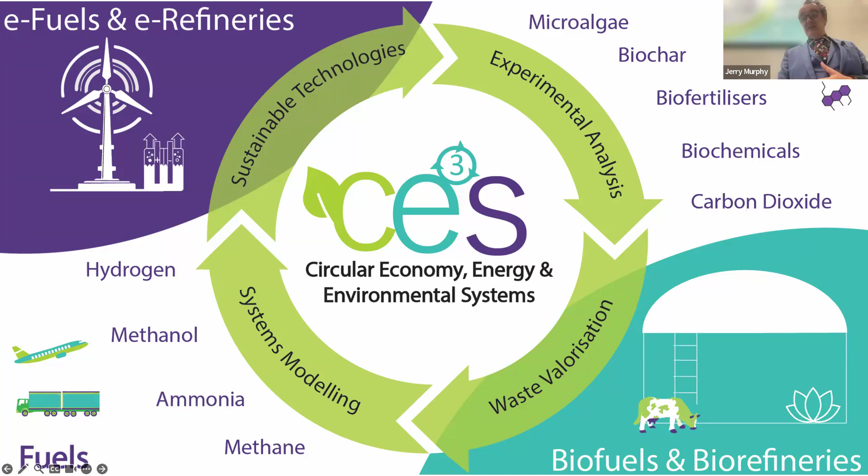Then we started looking at biochar, and then began integrating electricity into our fermentation processes. So we're into bioelectrochemistry, and we look at e-fuels and e-refineries. We do a lot of work at the moment in what we call power to X, using electricity to make hydrocarbons. We look at hydrogen, methanol, ammonia, methane, and biochemicals. So it's a broad church with lots of involvement.

I think what's interesting is when we look at decarbonisation, because this was the big challenge of our centre. We're going to have offshore wind, and how do we bring that into society and see the impact?

What I find interesting - I'm not an electrical engineer - is that at the moment we're averaging about 40% renewable energy supply in electricity from onshore wind primarily. And we have experienced a world record in system non-synchronous penetration. This means the ratio of variable renewable electricity to our demand, and that's at 40%.

And we're heading for 80%. That's our target for 2030. So we're already at world record level trying to manage a grid, and we're an island grid, and that's the challenge. We can't plug into France next door or Germany up here.

We are an island, so this is a huge challenge for us. And EirGrid, who we do a lot of work with, are very, very good at what they do, but they're very, very challenged. The amount of money we're going to spend on the grid will be extraordinary. For example, now I'm no expert in electrical engineering, but you have to manage the voltage and inertia.

They built a 130-ton synchronous condenser, which is a flywheel, purely to manage the frequency in the electrical system. And that cost 150 million. So it's not producing energy - it's purely to manage the wires.

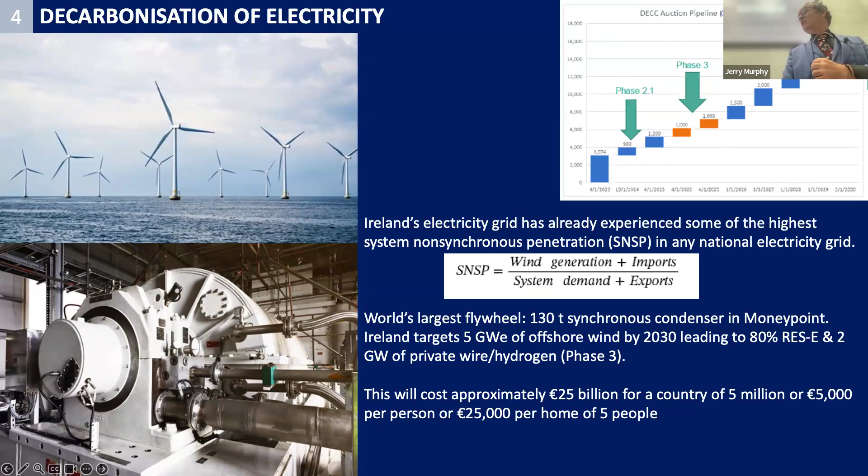When we continue to look at other things we're meant to do - we're meant to electrify transport, we're meant to purchase 945,000 EVs, and we're not meant to have internal combustion engines anymore - that's another 28,000 per home.

And then we're meant to deep retrofit. So we're meant to move out of our houses, re-insulate, underfloor heating, heat exchangers - average about 60,000, but you're also out of your house. You're in someone else's accommodation while they do up your home.

I was looking at a thing yesterday online - they reckon that 90% of the insulation put in the UK is wrongly put in. There's 130,000 heat exchangers being called back in Ireland. So we are employing technology that really isn't all that mature, and the workmen or the craftspeople aren't that well up on it. But we have a huge requirement, and that's another 60,000 per house.

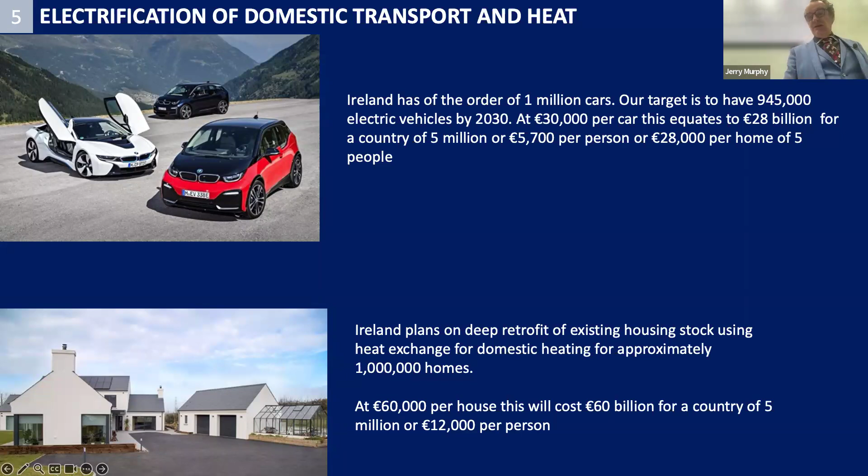So when you add up cars and retrofitting your house and offshore wind, it works out at about 120,000 per home. And that's the easy bit. That's what we call easy. Like we know what to do.

Then we get to the hard to abate sectors, and that is cows. 38% of our greenhouse gas emissions come from belching cattle, belching methane. Methane has a global warming potential 28 times worse than CO2.

It also comes from ships, planes, trucks. We're not going to have a battery on a plane. You're never going to have a battery on a plane, ever, ever, ever. So it's going to be hydrocarbon. We reckon that we can run trucks for about 400k on a battery, but after that, we need a hydrocarbon. So we need to make fuels.

And this is really the realm of chemical engineering. We also have cement production and steel production. Electricity is 20% of energy, so if we have decarbonized electricity, we've only got rid of 20% of emissions. There's the other 80, which is industrial heat and transport.

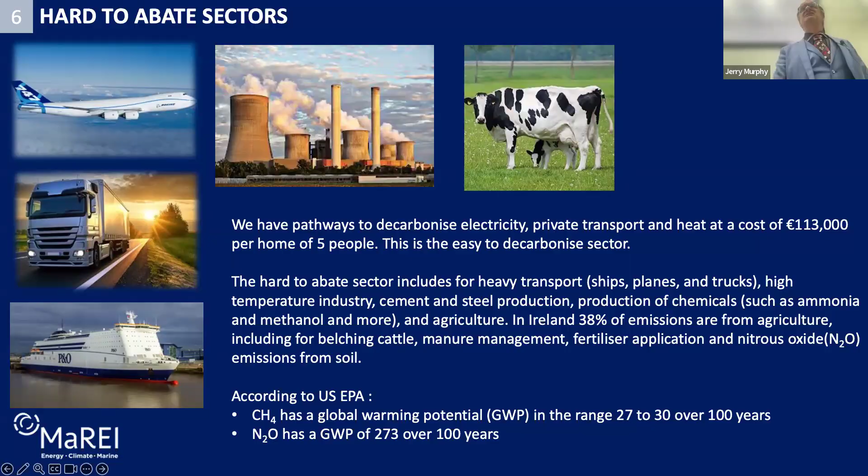I'm going to start at anaerobic digestion because it's probably where I started. So we're looking at a sort of biological process where we take waste matter and we convert it into biomethane or biogas, which can be used for electricity, heat, or transport.

And now we have a target, and it was quite interesting. I do a bit of work with the International Energy Agency - I spent a month in Paris last year. And when the war started, it really brought home to me, there's no climate emergency, there's none.

There is an energy emergency, because once the war started, we were contacted. The guillotine will come down, the gas is gone. Austria depends on Russian gas.

What do we do? We did a bit of work at the time thinking about this. We looked at a particular dairy facility and drew a circle of 10 kilometers around it. We thought if you digested everything, the slurries and the grasses in that 10 kilometers, you would replace the natural gas. So we were thinking, what would you do if it happened to you, if there was no gas coming? A lot of facilities are dependent on gas.

What's interesting is we get twice as much energy from the gas grid as the electricity grid. And a lot of the gas grid is used for the electricity grid in an Irish context. So natural gas is really, really important.

Because of that, the EU have said that we will have 10% of our natural gas from biomethane by 2030, and it will ramp up. At the moment, we're at 1%, so they want a 10-fold increase by 2030.

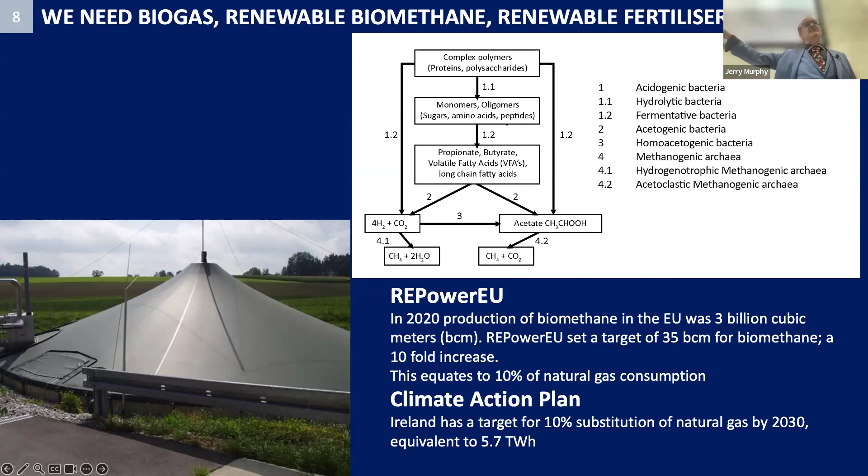There is no remuneration scheme. If you build an anaerobic digester now, there's no way of making money. There are biomethane plants selling less biomethane this year than last year. Some of them have severe financial difficulty. So we have all these lovely targets, but we're not looking like we're going to meet them.

Italy has this fabulous biogas-done-right system, which minimizes the carbon footprint of agriculture. They don't plow the land, it's no-till. They have a crop, say corn, but then they have a catch crop, another crop to make sure there's no bare earth. They don't want bare earth. So when you take down the corn and feed the cattle, there's grass. They cut the grass and put it in the digester, and the slurry goes into the digester too, minimizing their carbon footprint. They also have biogas, and they have fertilizer, because the byproduct is a fertilizer replacing fossil fertilizer.

There's no fertilizer. What happens if you have no fertilizer? You have no growth. So they're building digesters with only organic produce going in to produce an organic fertilizer to increase the growth, and then the biogas is secondary. It's like, oh, we have biogas, but they're doing it for the fertilizer. So they're increasing the yields on an organic farm by making a biofertilizer. We'd see this 25% of agricultural land meant to be organic by 2030 all having digesters, or else they don't have growth, because if you don't have fertilizer, you're not going to have growth of your crops.

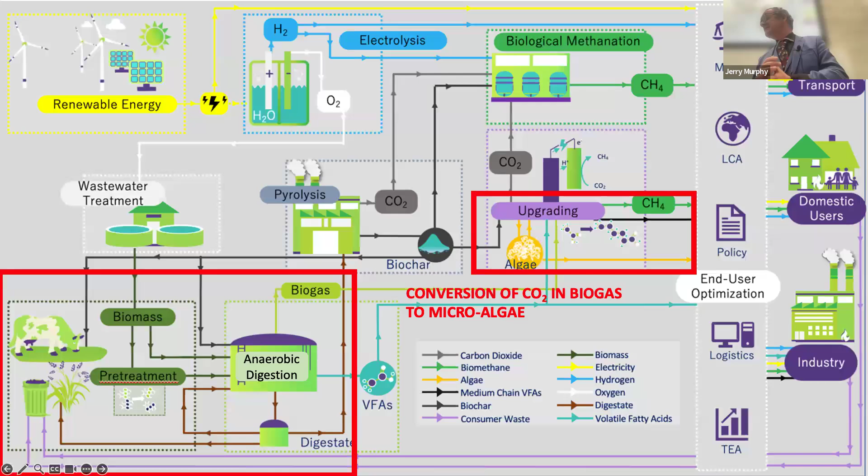This is a process we've been looking at: conversion of carbon dioxide in biogas to microalgae. I like this one, and we're applying it in Dingle. Biomethane is quite expensive and you need economies of scale, but we're saying even with a small digester, we can grow microalgae off the CO2. We've developed this technology, and my good colleague Archishman Bose is running with it now. We've got projects on this.

So we have a little tower - it's a carbonate bicarbonate tower, with pH around 10. We put the CO2 in and get this carbonate bicarbonate cycle. We put microalgae in, and the microalgae take out the bicarbonates, use it to grow, and give back carbonate. So in effect, your biogas, which is 40% CO2 and 60% methane, goes into a tower. Pure methane comes out one side, and the microalgae come out the other, and they grow.

We buy microalgae at home - my wife likes to make smoothies with cacao and spirulina powder. Truly awful, but it's very good for me and the family. It's €3.89 for 100 grams, that's €39,000 a ton.

So we're looking at this project in Dingle. They want the biomethane for their tractors, a small scale anaerobic digester, and a microalgae product. We're looking at really intelligent, highly paid people working down in Dingle at a biorefinery producing microalgae and biomethane to run their tractors. They currently pay $1 million a year for their food waste to go to Waterford.

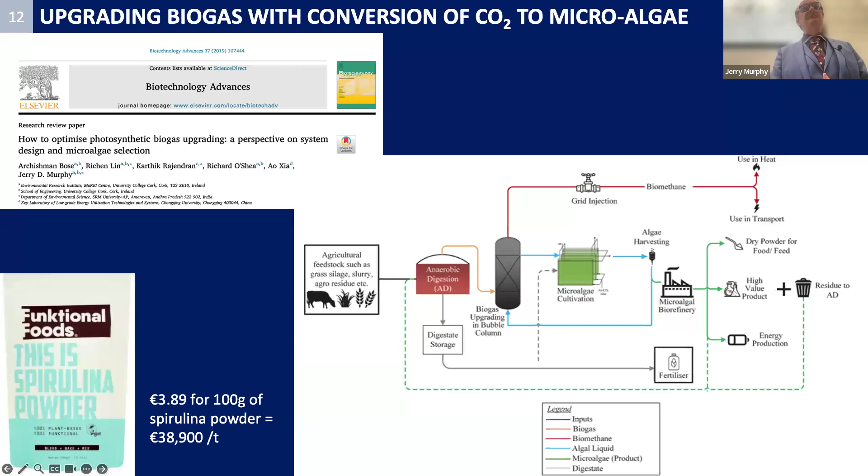There are many things you can do with microalgae besides eating it, but it is a very important product. Then we're looking at the digestate - this liquid digestate comes out and typically you put it on agricultural land as a biofertilizer. Sometimes there's too much of it.

So we've been working with a very large distillery in Midleton, looking at anaerobic digestion. But there's so much byproduct that you're now doing nutrient management balance on hundreds and thousands of hectares of agricultural land.

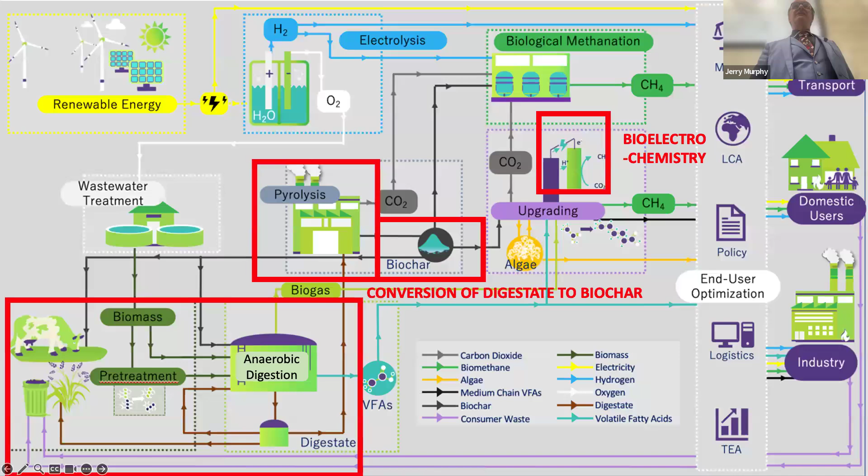I worked on a pig farm in Offaly about 20, 30 years ago, and we had to go for planning in 3 counties with the slurry from the pigs. We had to do a nutrient management balance on every piece of land.

So go back to your farm. If they do this in the farm, they get more negative certified emission. It's allowed in the Renewable Energy Directive. So there's an equation which includes this as soil sequestration. Rather than pulling CO2 out of the atmosphere, burrowing down half a mile and putting CO2 as a gas underground, you're putting it on the land, increasing photosynthesis. Farmers are happy.

I have a picture on the next slide. Again, it's like a black soil. Another thing my wife buys is activated charcoal for digestive discomfort, and it sells in my local shop for 16 euros. We have it at home. That's 1.3 million euros a tonne.

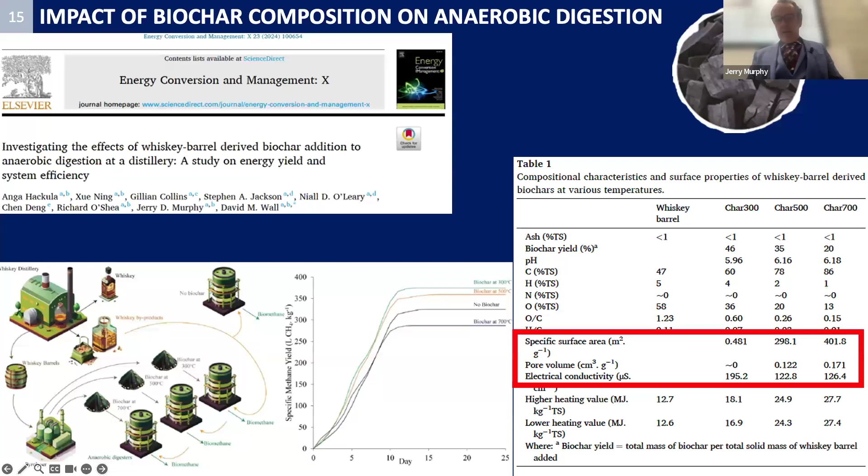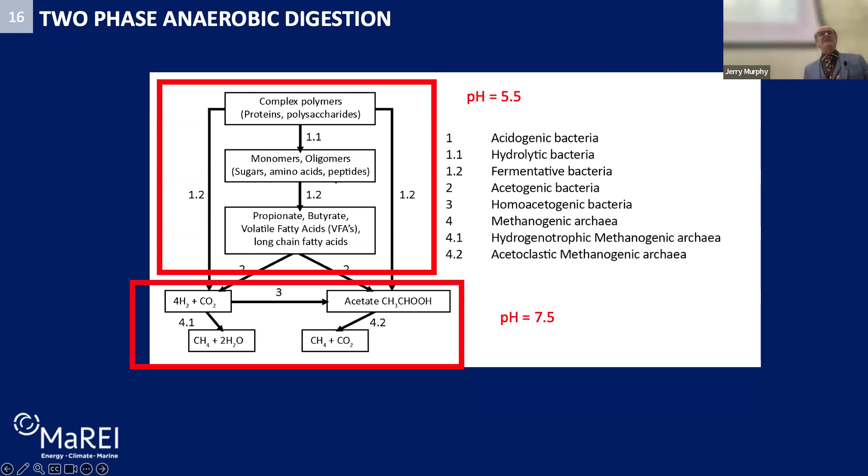So we do a lot of work in anaerobic digestion, and we've done a lot of work on reactor design. For us, it's a two-phase system. The first phase is at a pH of 5.5. So if you start off with complex polymers, say grass, it's liquefied. If you put grass in a barrel at the bottom of the garden and go down in 2 weeks, it's liquefied, then it ferments, and all that happens at about pH 5.5. Then the next process, which is the methanogenic process—they're archaea, not bacteria—happens at 7.5. So we're fans of breaking the process up into two chambers.

So that was interesting, a nice learning. And there's the char—you can see what it looks like. It's like coke, it's black, it's pure carbon. We then thought, what about sticking electrodes in here? Why not put a bit of a cathode and an anode inside the anaerobic digester?

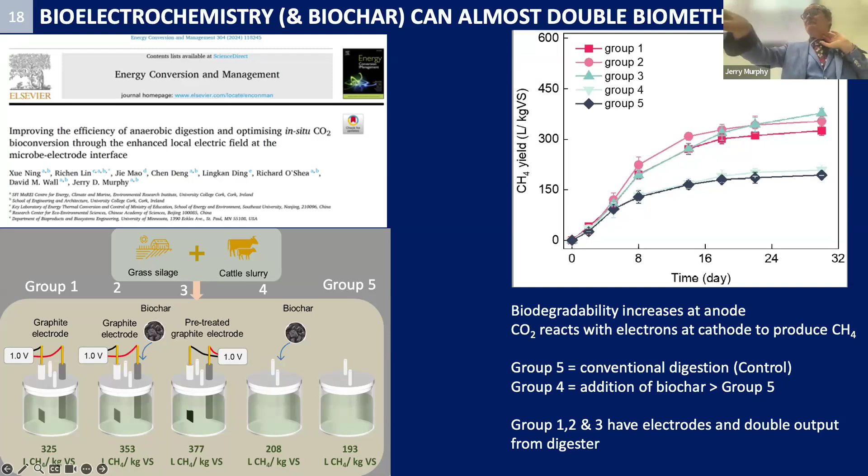So we have this target to replace 10% of natural gas with biomethane. We're now saying we can halve the feedstock, because we'll get double the methane from a given feedstock by putting in 2 little electrodes. Now we're doing more work—we're now, and this is part of this paper...

This paper, Royal Society of Chemistry—we're now 3D printing electrodes with char. It'll be bioelectricity because it'll be alive. It'll be 400 meters squared per gram. We'll make that char at 700 degrees Celsius, and all these bugs will be living inside the electrode. We'll have these extracellular polymeric substances all around it.

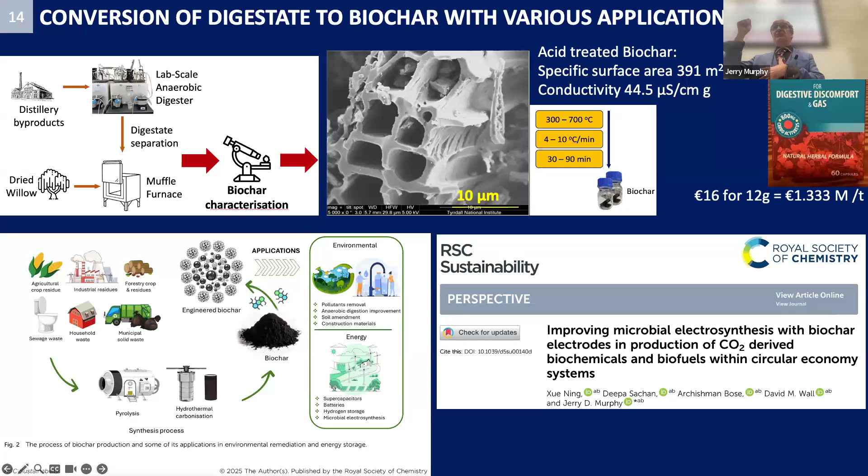So that's our next step, and that's a really beautiful circular economy. Your digestate is converted into char, we print the cathode, we put it back in the electrode, and we double the output of methane. So that's part of our integration of electricity with anaerobic digestion.

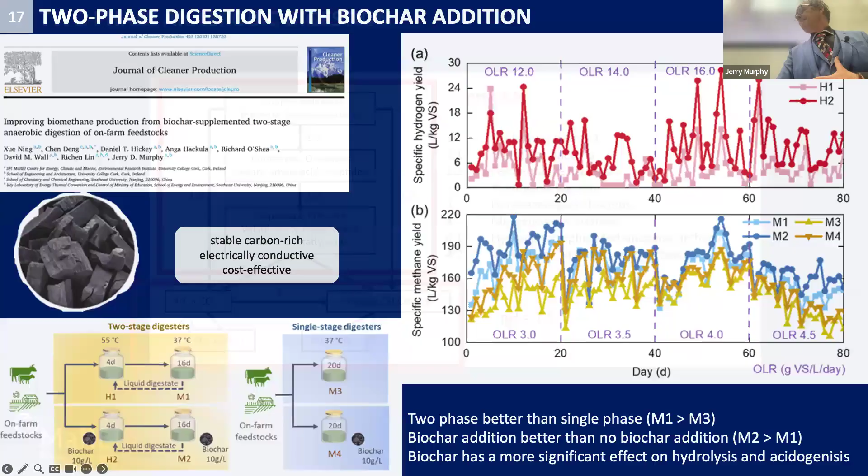So now we're moving on to offshore wind, and we'll work our way back again to fermentation processes. We wrote this report for the International Energy Agency, Circular Economy Approaches to Integration of Anaerobic Digestion with Power-to-X Technologies. When we talk about X, when X is equal to 1, it's hydrogen—so we split water in an electrolyzer, very, very simple.

We have to get rid of fossil hydrogen, and we have to get rid of it by making renewable hydrogen from offshore wind, from PV, from electricity. We split water into hydrogen and oxygen.

X equal to 2 is methane. So we get some form of biogenic CO2 and we react it with hydrogen and we make methane. We consume twice as much energy from the gas grid as the electricity grid, so we need renewable natural gas. We can't have fossil natural gas.

Then we go on to methanol. World demand is 110 million tons in 2021. We need renewable methanol, we need renewable ammonia so we can make green fertilizer. So hydrogen from offshore wind, nitrogen from the atmosphere, Haber-Bosch, green fertilizer, not fossil fertilizer.

When you put fertilizer on the soil, it's natural gas. You're putting natural gas on the soil. In a net zero world, there shouldn't be natural gas and we shouldn't have fossil ammonia.

We have a lovely 200-acre site sitting in the harbour that used to make ammonia from offshore gas. Our thesis is stick an electrolyzer there and make green ammonia, and there's a train track behind it, and make green fertilizer and help the farmer.

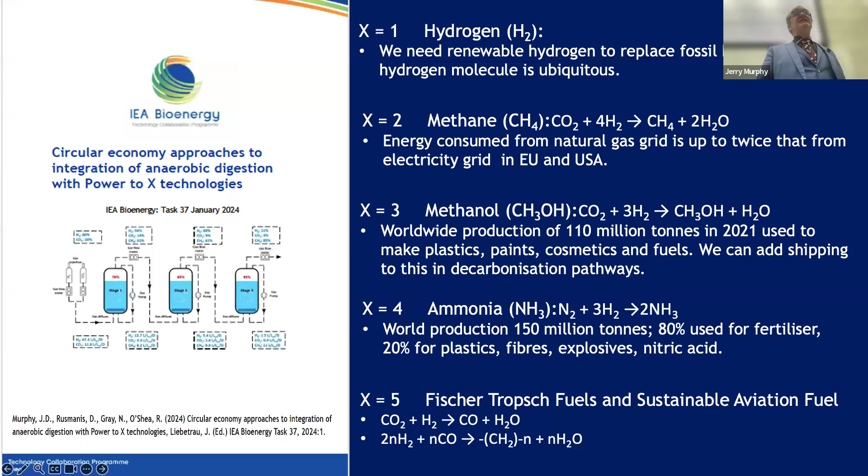And then we look at Fischer-Tropsch, and that's leading us to SAF, sustainable aviation fuel, and renewable diesel. So we're trying to decarbonize all of these fuels.

But when you look down south off Cork and Waterford and Wexford, we're looking at maybe 2 gigawatts. We don't have the capacity to take that to Dublin. The grid isn't strong enough, the wires aren't big enough.

An energy park, data centres, hydrogen, ammonia, methanol, shipping fuel.

We also set up a company called Cork Biomanufacturing. We can make proteins from offshore wind. Hydrogen, CO2, onto acetate, onto protein. So we can make protein.

I think that protein would be more for cattle than for humans. Italy has already banned alternative proteins, but there's a whole market in new proteins, and this would be a way. So we have all these options that we could do in Cork.

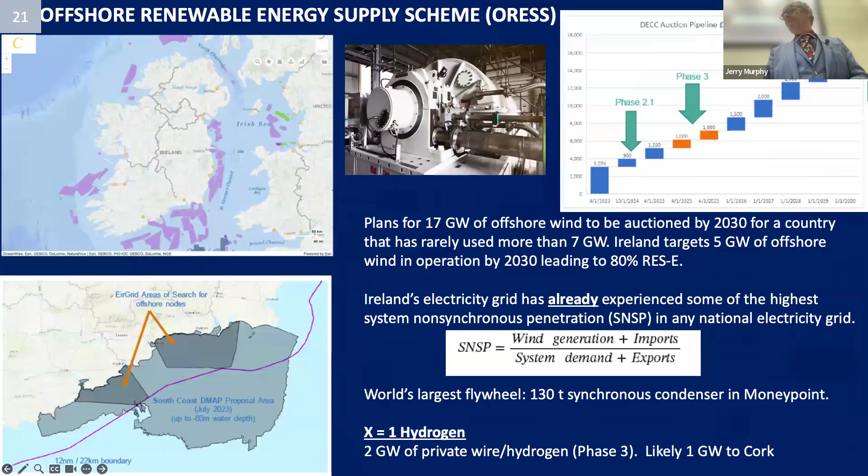So I found that quite interesting. We had our anaerobic digesters and we just stopped giving them slurry and grass and only gave them hydrogen and carbon dioxide. And what we found is that all of a sudden we were dominated with Methanothermobacter wolfeii. Wolffi is the Latin for tungsten, and they like a little bit of tungsten, they work better. But we were now converting hydrogen and carbon dioxide to methane.

And we ran little batch reactors, and then we ran some larger reactors. We found in the process engineering, hydrogen doesn't go into solution readily. We had to put it under pressure. We had to recirculate it. So we devised the system based on one reactor.

We modeled it, so we varied the composition of the reactors, and then we made this. This cost us a lot of money. It's a little demonstration scale.

So under pressure, we were introducing hydrogen and carbon dioxide into R1, under pressure, then into R2, then into R3. And if you look at this side, which I think is the right, you can see R3 was almost pure methane. So we're now converting CO2 to methane in what we call an ex situ biomethanation rig.

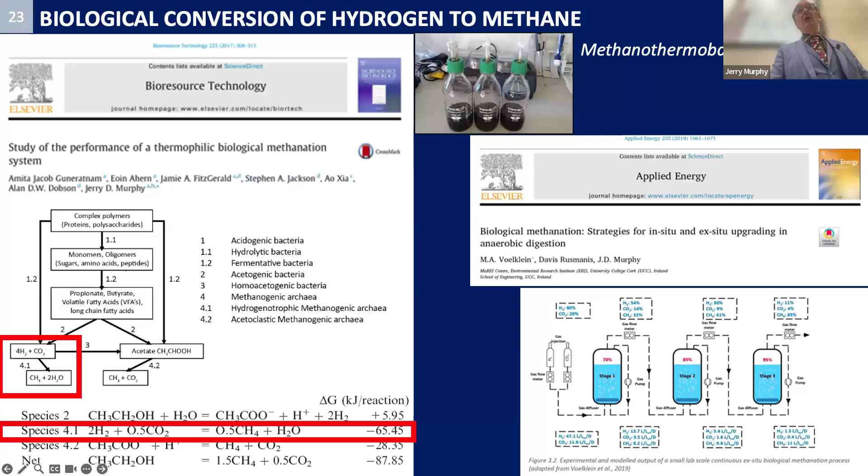So it works. What we modeled works, and all we're doing is 4H2 plus CO2 equals methane and water. So we're doing what has been done by these archaea since time immemorial, long before humans walked the planet, before the dinosaurs. And they're very happy to do it. It's exothermic, it gives off heat. It works, it should be no shock. The patentable stuff here was the way the rig was set up.

So why would you do it? Why? I've been asked, why would you want to convert CO2 to methane? Why?

So this is our next piece. We're looking at application of power to methane at a wastewater treatment plant. One of the challenges we have, because we're an island, is we dispatch down or spill electricity. So the target for renewables for 2030 is 80% renewable electricity, 51% emission reduction.

But, and this you have to consider, we're at 40% renewable now, and we have to spill 14% of renewables. So in the middle of the night, if we've 17 gigawatts blowing, we've never used more than 7, we're all in bed, we don't have air conditioning, there will be lots of electricity. And the idea is we would convert that to hydrogen.

What tends to happen in the energy market is in Copenhagen, for example, they have negative pricing. And what happens at negative pricing, all the turbines are blowing. They have a little bit of fossil fuel. If you tell a combined cycle gas turbine to go offline, they charge you money. So you're told if you can use that electricity, we'll pay you, because otherwise we're paying a big power plant to go offline. So there's negative pricing.

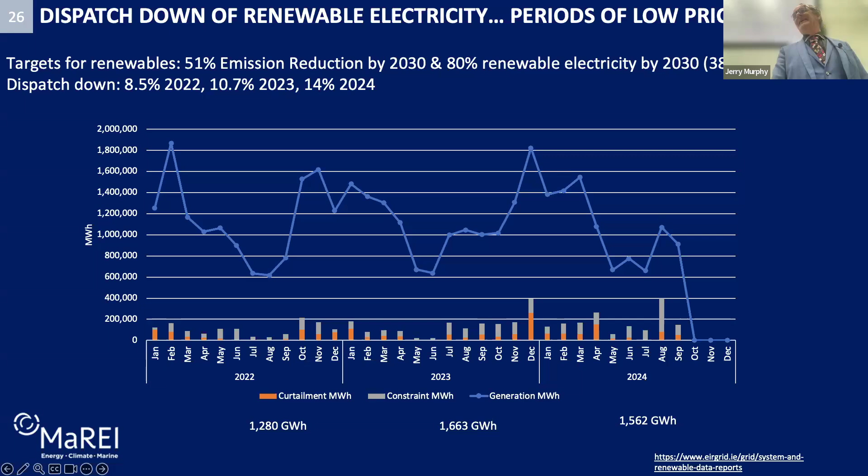And I visited a plant in Germany, and they paid an average 1 cent a kilowatt hour for their electricity because they were taking electricity that would otherwise have required a power plant to shut down. So we're looking at getting electricity when it's cheap, when it would be curtailed or dispatched down.

So we looked at, I was part of a design team in 1992, Cork Main Drainage, Carrigrennan. I haven't been there since. So I designed the anaerobic digesters. I was involved in the storm overflows, never been there. So we thought, if you wanted an electrolyser in Cork, where would you put it that people wouldn't complain? The wastewater treatment. Anyone here been to Carrigrennan?

Up one. So it might not cause people to object because they might know it's there, something out there they've never been to. So we thought, let's put an electrolyser at a wastewater treatment plant. And the idea would be the oxygen could feed the aeration basin. So rather than pumping air, you pump oxygen. It's 5 times less volume, 5 times less pumping. It reduces considerably the power footprint of the wastewater treatment plant.

And we figured out we needed 7 million meters cubed of oxygen, and that's a 10 megawatt electrolyser. That was equivalent to 10% curtailment of a 144 megawatt offshore wind farm. So we're taking curtailed electricity, the oxygen from splitting the water is going to our wastewater treatment plant, and we'll have twice that amount as hydrogen because it's 2H2O. So we have 14 million meters cubed of hydrogen at the electrolyser.

And we thought there's a biogas plant there. I designed it. It's converting sludge to biogas, and that's as far as it goes. So we could use our ex situ biomethanation and convert the biogas to pure methane, and all the CO2 will become methane. So you can see here we have 1.4 million meters cubed of methane from the sludge digester. We had 776,000 meters cubed of carbon dioxide that becomes methane. So you're upgrading, but you're also increasing the methane.

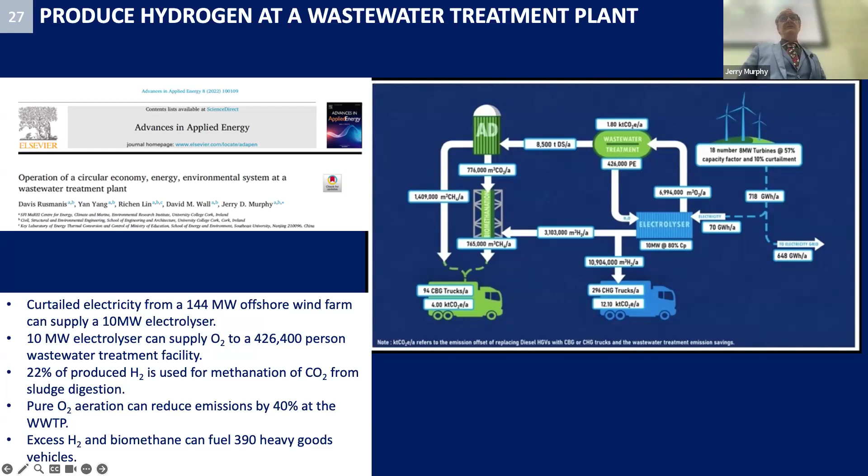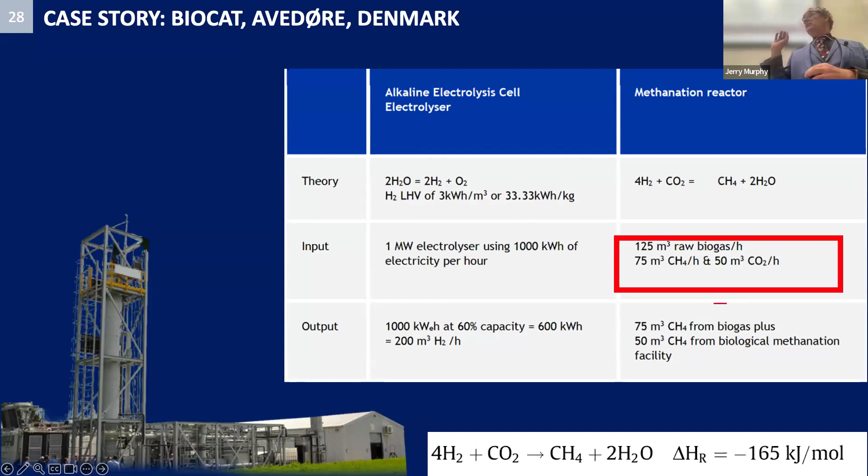This is a plant outside Copenhagen called BioCat. It's a wastewater treatment plant, and at that plant they have 125 meters cubed of biogas per hour, of which 50 is CO2 and 75 is methane. With ex situ biomethanation, that 50 meters cubed of CO2 becomes 50 meters cubed of e-methane, so you've now got 125 meters cubed of methane.

You've got pure methane. You need 4 times the amount of hydrogen as CO2, so you need 200 meters cubed of hydrogen. Hydrogen is 3 kilowatt hours per meter cubed, so you need 600 kilowatt hours of hydrogen. An electrolyser is about 60% efficient. You have a 1 megawatt electrolyser giving you 600 kilowatt hours of hydrogen, upgrading 50 meters cubed of CO2 to 50 meters cubed of methane. So it's a nice, tidy process.

And now your biomethane could run a truck, where before it couldn't run a truck. So you've increased the exergy. We would see heat as lowest value, electricity next, and highest value is transport fuel.

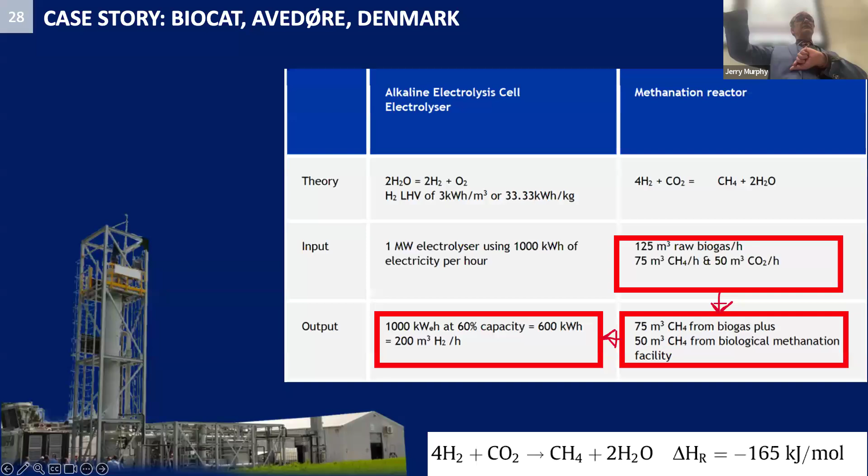So then we're looking at how does it all fit together, the integrated circular economy system. For example, in Denmark we've been working with a company called Nature Energy.

It's been bought out by Shell. They have these really large digesters, bringing in about 600,000 tons of dung, slurry, and food waste. They have catchments of about 25 kilometers, with pipelines - a farmer goes to a sump, drops in slurry, it's screw-augered 25 kilometers into the digester. At the moment, they are replacing 39% of natural gas on a year-on basis with biomethane, so they're way ahead of the posse.

But if you put an electrolyser and an ex situ biomethanation at those facilities, you're increasing the methane output, because all the CO2 becomes methane. So they'll be at 65% green gas by adding an electrolyser and ex situ biomethanation at their digesters. The joy of this is they have about 12 of them, but they're massive, so it's only 12 systems, and they've increased their methane output by about 60%.

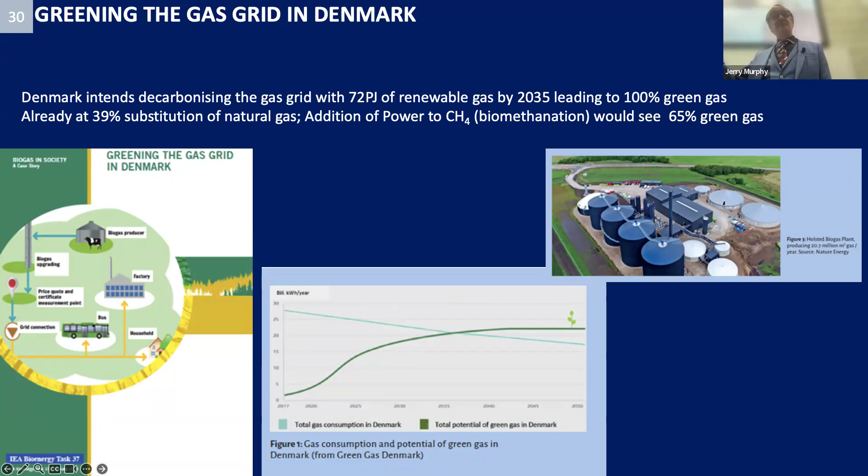Methanol - we've been looking at Cork as a concept. Irish distillers have 50,000 tons of almost pure CO2 as a byproduct from fermentation. We will have anaerobic digestion in the harbour; it may be that we digest the byproducts from the distillery. So minimum 50,000 tons - that was the basis for this thing we were thinking about.

Then you'd have an electrolyser, you'd produce hydrogen, and you'd react the hydrogen with the CO2 to make methanol. There are two ways of making methanol.

One is reforming biomethane. At the moment, Maersk, who are responsible for lots of shipping, are going to Denmark saying we want your biomethane. They're converting it to methanol, and they've built 20 tankers to run on methanol, but they can't find the methanol. So they've gone to Denmark and said, we'll take your biomethane, reform it to biomethanol, put it in our ships.

There's very high standards in shipping. What's interesting about shipping is every country has a vote - every single country has one vote - and they've decided that shipping will be carbon neutral by 2050. Roughly, off the top of my head, it's about 20% decarbonisation by 2030, and you have to do it. It's the IMO. So there is a demand for methanol.

And methanol - we already have 110 million tons for other uses. We're going to have the same again for shipping. So it's happening; methanol is a liquid that will be used in ships.

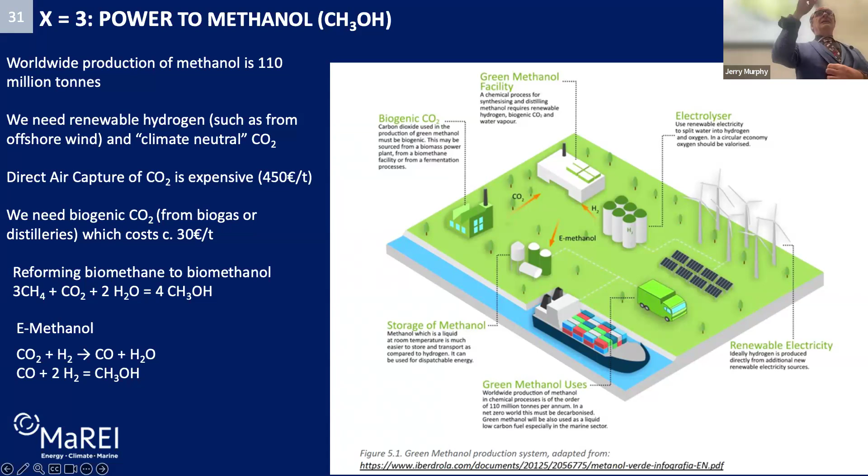The other option is e-methanol. Carbon dioxide and hydrogen gives you carbon monoxide and H2O. Carbon monoxide and 2H2 gives you methanol. So we have two ways of making methanol: convert biomethane, or use hydrogen from offshore wind and biogenic CO2.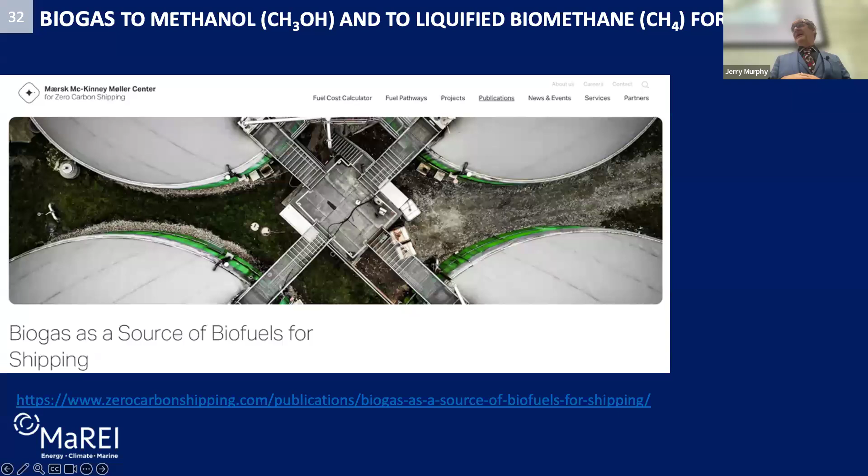This is Maersk - they have a whole document about zero carbon shipping, and it's either methanol from biogas or liquefied biomethane. Green ammonia - this is a facility in Cardiff. I need to hurry up. Haber-Bosch process: hydrogen plus nitrogen gives green fertilizer.

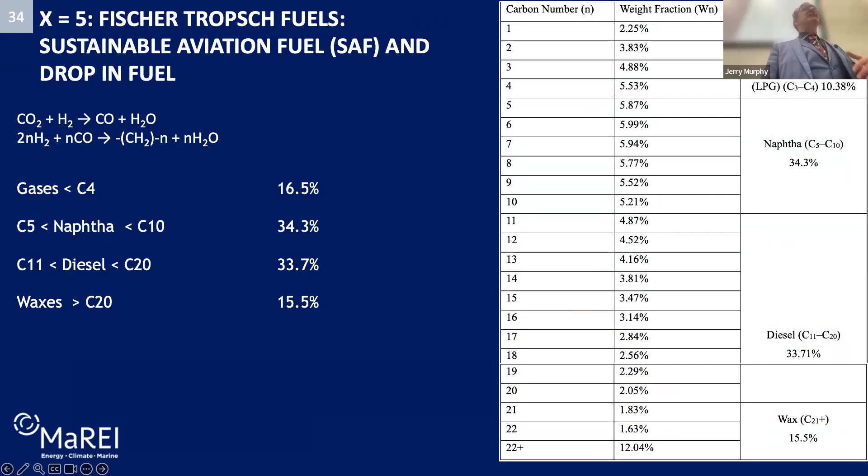Fischer-Tropsch - we've been struggling a little bit with this, how we deal with all the different components. With Fischer-Tropsch, only 68% is liquid, about 34% is diesel; you also have waxes and gases. We're struggling with allocation methodologies to try to figure out how you put a value on each piece. We want Fischer-Tropsch diesel for shipping.

Celtic Cluster: Lower Harbour, Irving Oil, ESB, gas networks. The refinery wants to go green - we'll have a gigawatt of private wire coming in, and we have gas fields where we can store CO2. They want to make biofuels, hydrogenated vegetable oil, SAF, decarbonised ammonia, methanol, and e-fuels. There's planning permission, I understand, for an ammonia combustion facility, so you can make dispatchable renewable electricity from ammonia that was electricity and is now used when the wind isn't blowing.

Dunkelflaute - we tend to get 20 days of no wind in the winter. So what do you do during Dunkelflaute? You make something, you store that something, and you use it for the 20 days.

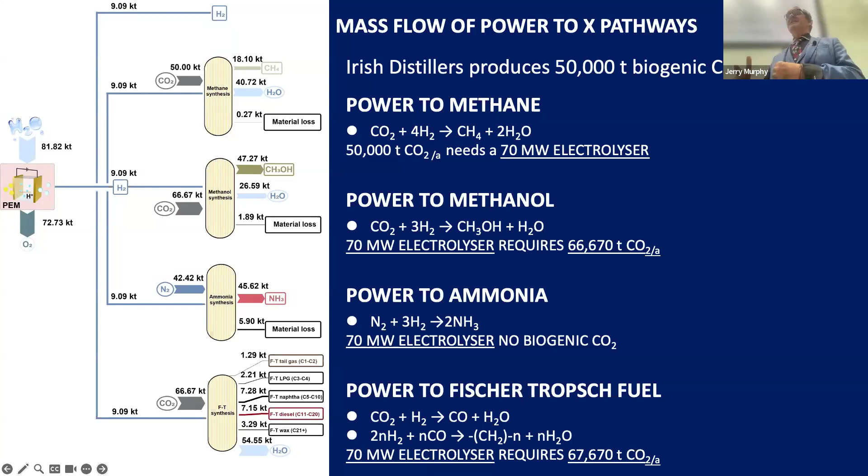So we've done a little bit of maths. We're looking at our 50,000 tons of biogenic CO2, and we're looking at power to methane. With very simple stoichiometry, we found a 70 megawatt electrolyser, so we used that for our analysis. Methanol requires more CO2, so we need an anaerobic digester. Ammonia needs no CO2, Fischer-Tropsch needs extra CO2. So we've done the maths.

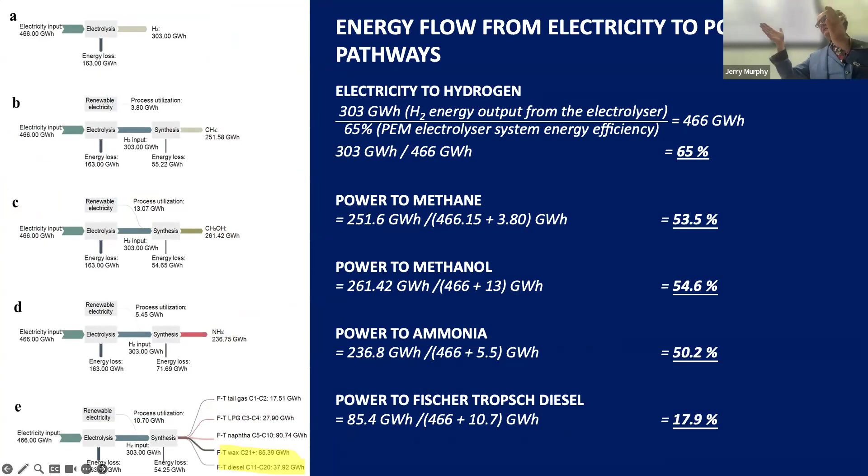What's interesting is we have a project with colleagues in America, they're trying to model the electricity grid. If you have 100 kilowatt hours of electricity, you make 65 kilowatt hours of hydrogen, 54 of methane, 55 of methanol, 50 of ammonia, and only 20 of Fischer-Tropsch diesel. So we've done the maths on what sizes they'd look like and what they'd cost.

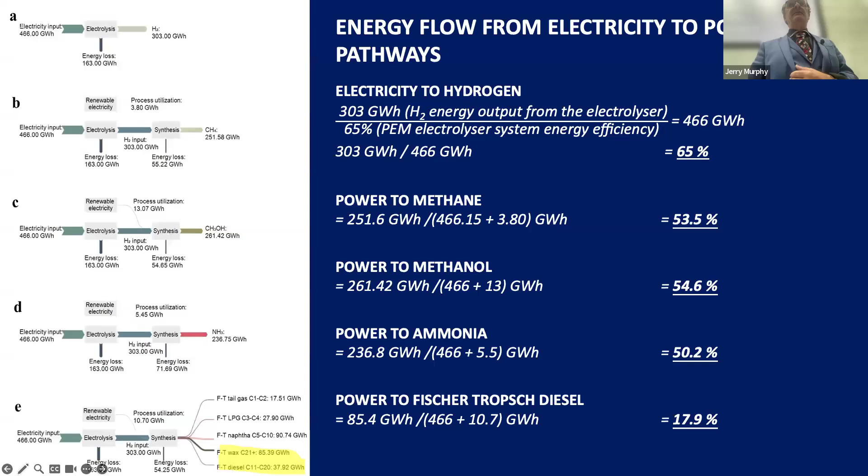What's interesting - this is a paper we're going to submit in the next few days. This looks at shipping fuel in 2050. 705 terawatt hours is the target.

So if we wanted all that to be decarbonised, you'd be looking first of all at cheap CO2 from biomethane or ethanol or whiskey. After that, you go to biomass combustion, so wood chip burning, and that's more expensive because you have to get rid of the nitrogen. And after that, you're going to direct air carbon capture.

So biomethane, we reckon, is about 30 euros a tonne. If you go up to the Midlands and go to the wood chip facility, that'll be about 80 euros a tonne because you have to get rid of the nitrogen. And then direct air carbon capture, pulling it out of the air, is 450 euros a tonne.

So what we found - that little red line there is Fischer-Tropsch diesel, which is only getting a 20% return. So it requires lots of CO2, uses up all the biogenic CO2 very quickly, and then it's buying direct air carbon capture.

So we found the average value for Fischer-Tropsch diesel is 311 euros a megawatt hour. That's 311 per ton of diesel equivalent without taxes - so 3 euros 11 - whereas methanol is about 117, because methanol is very efficient, and we would have enough biogenic CO2 from ethanol, from whiskey, from biomethane if we do what we're meant to do.

So if we build all the biomethane plants we're told we should, that CO2 would allow us to make shipping fuel to the level of the demand for shipping fuel. So that's only 1 euro 17 per litre of diesel.

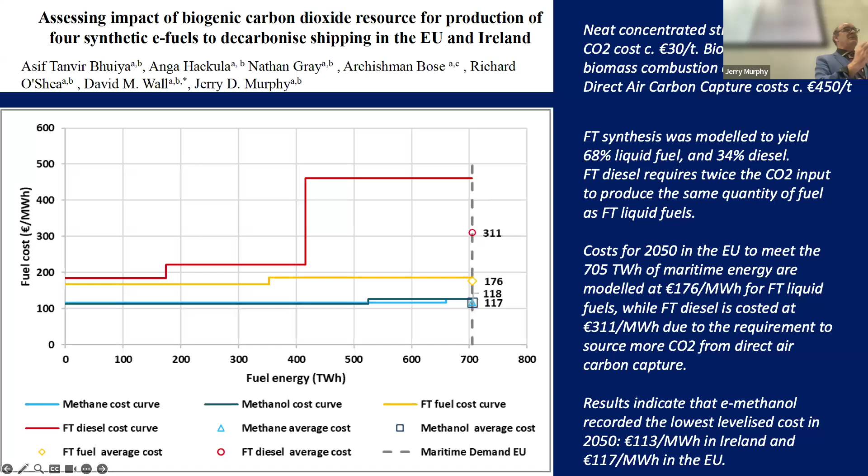So methanol is cheap, requires small amounts of CO2. Fischer-Tropsch is very, very, very expensive because of all the other elements there.

So this is our sort of biofuel, biorefinery, e-fuel, e-refinery. We based it on a distillery, or it could be a creamery - it's a food and beverage industry. They're making their product, and we take their byproducts.

We would suggest a two-stage fermentation: dark fermentation, and then methanation. We would take our digestate and make char. We'd put the char back to a wastewater treatment plant. We'd upgrade the contaminated water to potable water. That goes into the electrolyser, producing hydrogen that reacts with the CO2. And we now make methanol, or Fischer-Tropsch, or ammonia, or methane.

We also looked at duckweed from the digestate to replace the spillage - sorry, the distillery produces a feed which is fed to cattle. So we thought we can feed the cattle duckweed because we've used all that to make energy. So it's a sort of refinery, e-refinery, biorefinery.

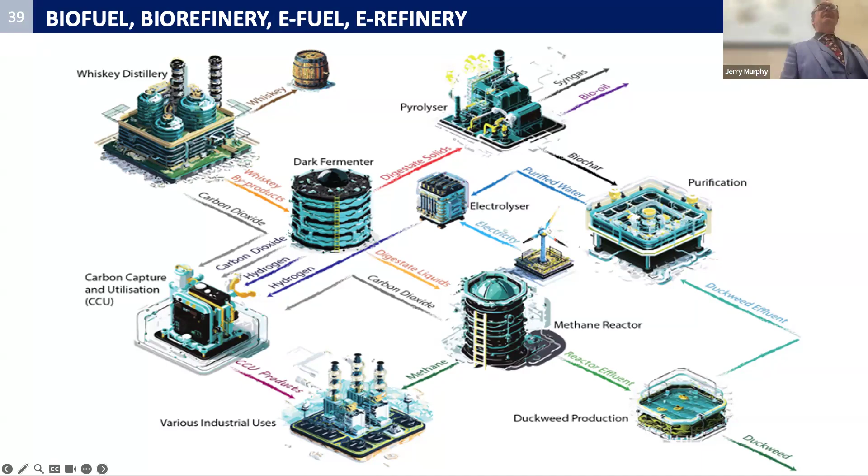We can also make volatile fatty acids in that dark fermenter. We've also made caproic acid in our MES systems, which is another topic.

I'm nearly there. We did a few papers about heavy transport. So this is heavy transport - we can't electrify everything. And this is what I want to get across.

So the best model would suggest that electricity can get to 55% of energy. At the moment, it's 20%. So if we tried to electrify all our cars, as many trucks as we could, our houses, we'd have 45% left, and that would be industrial heat. You can't make glass without gas - you have to have a gas.

Planes will always have a liquid fuel, ships will have a liquid fuel. So what we looked at here is these fuels. Down here, at the zero, that is the nadir - it's the worst place you want to be. And down there you have lithium ion - very voluminous, very heavy. And up at the top, you have utopia.

Not much is up there, but you can see the best ones are jet fuel and diesel. So they have quite compact energy.

We looked at a lithium-ion battery for London to Dubai. The battery would be 5 times bigger than the plane. So you're not putting a battery on a long-haul flight. You might get Cork-Dublin, but you're not doing any long-haul.

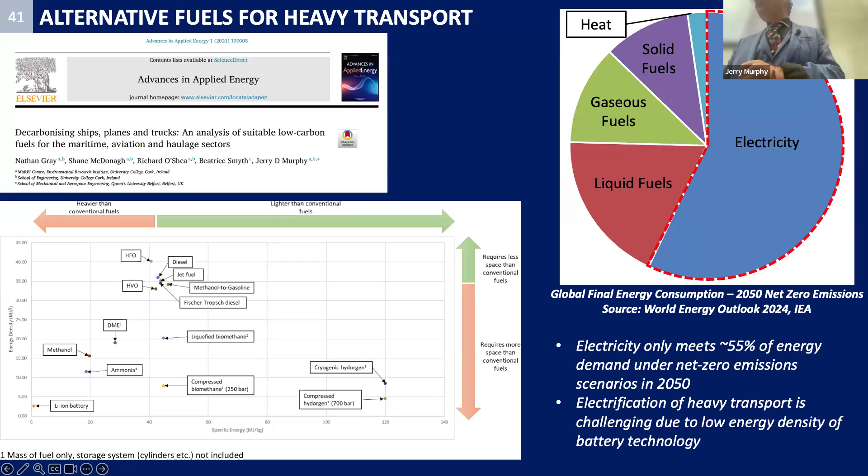So we realized we need to get these methanol, Fischer-Tropsch fuels. We need heavy fuels, and they have to be renewable.

One of the things we looked at is in Sweden. They ran the bus service off biomethane from slaughter waste in Linköping. Linköping is about the size of Cork. Slaughter waste, slurry, into the digester, ran it into the buses. All the buses run off biomethane, with digestate going back to the land.

They lost the contract, and in came electric buses from China, replacing Scania and Volvo and the circular economy. TV crews came to take photographs of the electric buses from China, so Volvo and Scania were left out. The electric buses were then freezing, because it's minus 16 up there, and they'd have to put a fossil fuel burner in the bus so people could be warm. So they weren't all that happy.

But within a year, they had replaced it by liquefying the biomethane, cryogenic, about minus 173. And these trucks run 1,000 kilometers on one fill. Again, it's Sweden, they have Scania, they have Volvo. Nothing else will take you 1,000 kilometers on one fill besides this cheap biomethane, because it's coming from slaughter waste, it's coming from slurry. There's no other value for it.

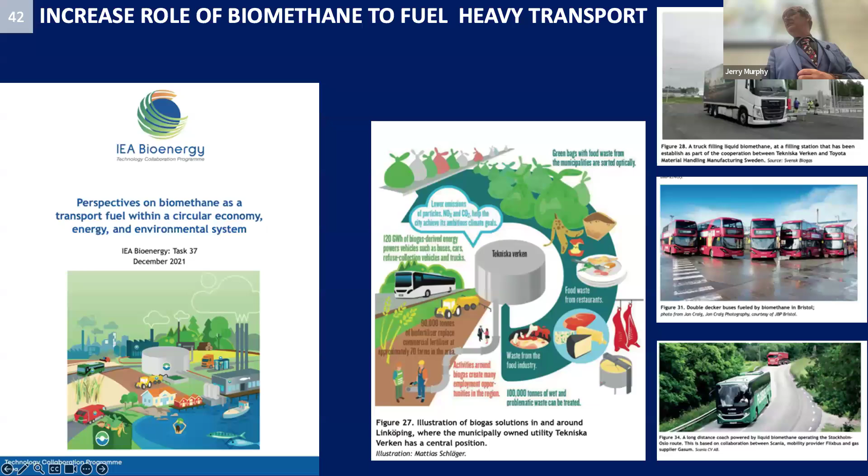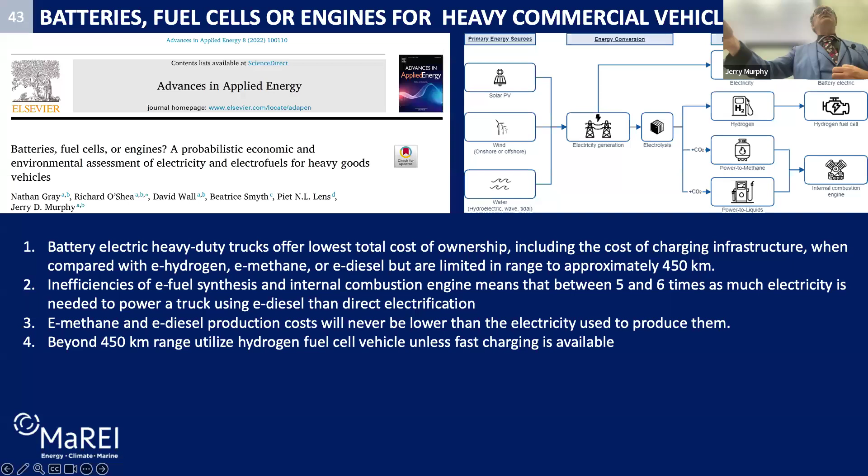We then looked at batteries, fuel cells, or engines for heavy commercial vehicles. We found a battery would work up to about 450 kilometers. After that, you have two choices: you stop and plug in your truck for a few hours, or else you stop. I was over in America last week, and they're saying truckers do not do 450 kilometers, they do 1,000 miles, they just keep going, they're not stopping. So then you'd have to have a hydrogen fuel cell. So our thesis is: hydrogen fuel cell beyond 450 kilometers, under 450, a battery.

We looked at deep sea shipping. The problem with deep sea shipping is they have massive fuel storage, it's a heavy fuel oil, and they can circumnavigate the Earth once or twice. So if you bring in an e-fuel, you're going to have to stop because it's more voluminous. So all of a sudden, rather than just going from Shanghai to Rotterdam and keep going, they'll have to stop somewhere along the way. So you have to change the operation of deep sea shipping. But again, methanol is the fuel of choice.

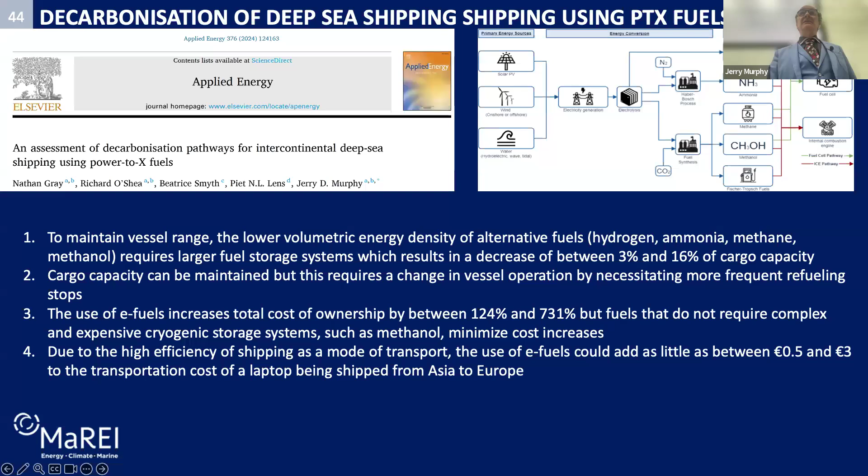The last one we looked at, and this really impacted on how hard it is to decarbonize, was aviation. What's interesting, which I didn't know before the paper, which was the idea of the research: 2% of CO2 comes from aviation, but 5% of warming. So you're up at 30,000 feet, you've got a contrail, you've got particulate matter, and that contrail—my good colleague Eamon Butler doesn't believe me, but the evidence is there—3% is contrails radiating, trapping heat. So if you replace jet fuel with sustainable aviation fuel, you haven't got net zero aviation because you still have contrails and you've still got warming.

So you spend all this money, about 5 times the cost of jet fuel, put it in a plane, and you reduce the problem by about 50%. So you'd actually have to have sustainable jet fuel and direct air carbon capture just to pull CO2 out of the atmosphere, in an accountancy process. So what we found, the cheapest way to decarbonize aviation was to burn jet fuel, do a calculation, and say you have to pull that out of the atmosphere with direct air carbon capture and put it underground. Which is a very sad output, but that's the output we got, because there was so much energy required pulling CO2 out of the atmosphere, direct air carbon capture, 450 euros a ton, finding your hydrogen—really expensive fuel—and you're only halving the problem. So that was sort of depressing.

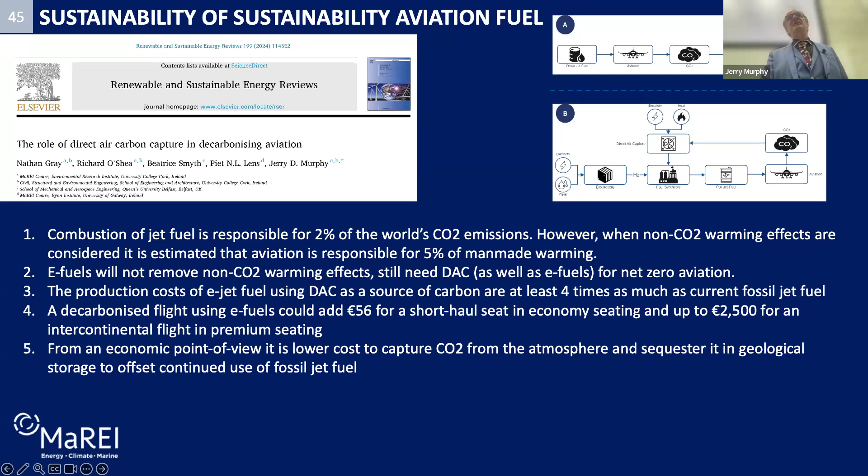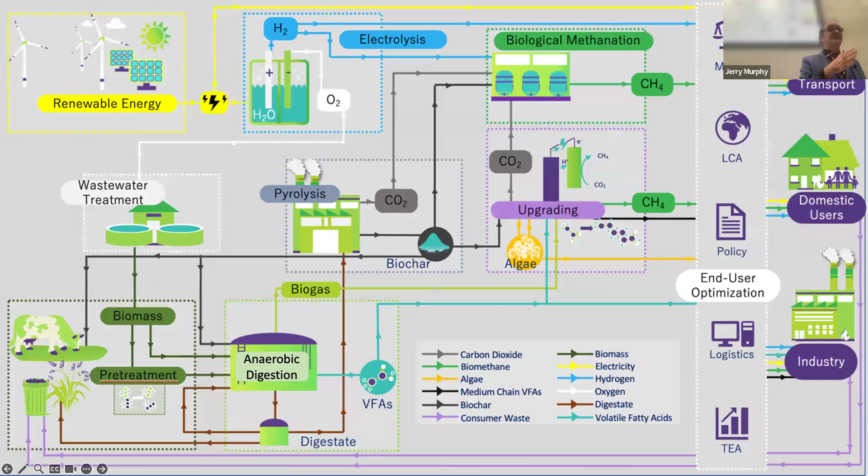But that's what the hard-to-abate sector is, because, for example, renewable fertilizer also only halves the problem. When you put fertilizer on the soil, you have nitrosomonas and nitrobacter, and they give off N2O, and N2O is 273 times more warming than CO2. So making renewable fertilizer is half the problem, and making sustainable aviation fuel is halving the problem. Net zero is a folly. That's me done. Thank you.